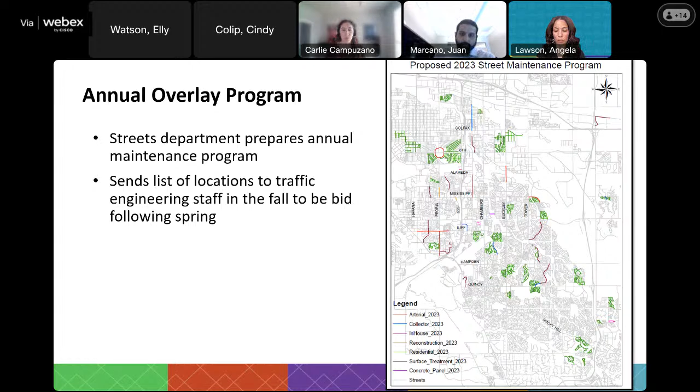They normally send the initial list to us, to my group in traffic engineering, around every fall. And then we go through this list really closely to determine which projects we want to include that will be then bid out in the following spring. So from about fall to spring is when we're looking at what we want to do as far as making changes to striping.

Next, I want to touch on why it's beneficial to restripe with an overlay or with the other pavement maintenance types of projects as well. So these pavement maintenance projects really just give us a clean slate of roadway to work with. If we're looking at making big changes, it's a lot easier to make them when there's no markings on the pavement, rather than trying to make changes to a road that's already striped.

Sometimes we do make some changes to roadways that already have striping on them, but in those cases, what we have to do is conduct some removals of striping. Removals can be pretty tough. They either have to be ground off, which is really time intensive and is not great for the pavement, or there are other ways they can be removed, but they end up not being always fully removed, which is another issue. So it's really the best time to make striping changes is when there's either a brand new roadway or when these pavement maintenance activities take place. We really try to capitalize on that to get some of our planned improvements in with that project.

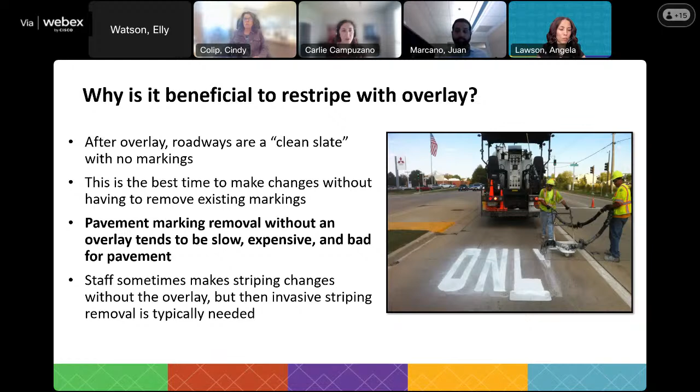So I wanted to take you through the process of how we review roadways for striping changes. When we get that initial list from streets, a lot of times they'll already have it uploaded into GIS. So we, being the traffic engineering group and my team, as well as our transportation planning group, have different meetings where we look at each and every roadway planned for pavement maintenance.

We look to see which roadways already have striping. For roadways that already have striping, are any of them already planned for bike lanes as part of our bicycle master plan? If not, we still look to see whether bike lanes would make sense in that location, or if there are other striping improvements needed that might not be bike lanes - like auxiliary lane changes or intersection striping changes. We look at all that and develop a list.

Once we have our list of projects, we also take them forward to a bi-monthly group we have internally at the city with a lot of different city departments, so we get others to weigh in as well, such as PROS and some other folks on those meetings. We try to get more input on which roadways should be included.

From there, we also sometimes need to collect data. If we're looking at reducing a lane or changing auxiliary lanes, then sometimes there's a data collection piece of this as well. After all of that process, we look at how we can implement these projects.

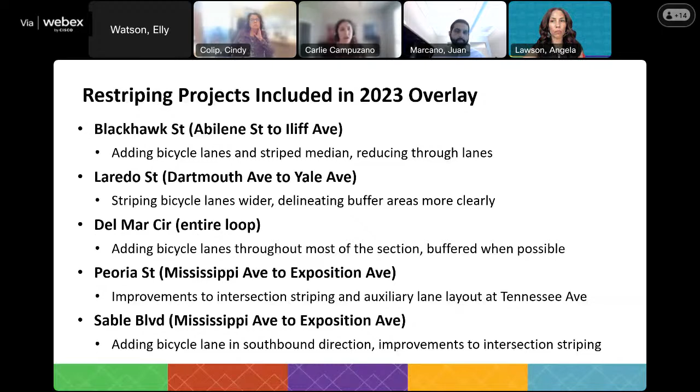So just wanted to give a couple examples of what these look like. This is Blackhawk Street, just a snip of a little part of it from our plans. The top part is our design plan that we created, and the bottom part is just an existing aerial. You can see it had 2 through lanes in each direction and a center 2-way left turn lane, and we converted that to a buffered bike lane with the striping redesign. The top graphic shows our plan for that.

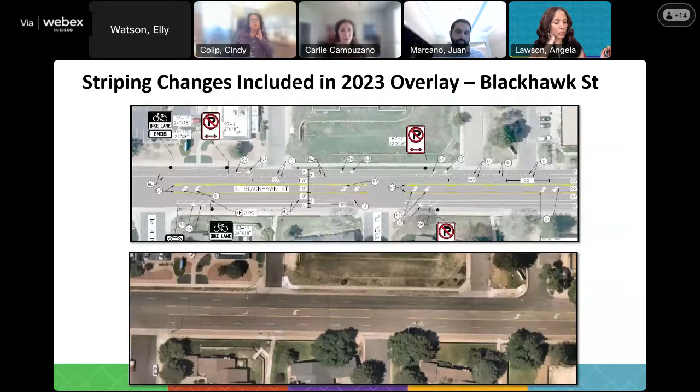This next graphic shows our proposed plan at Del Mar Circle. There's another one where there's a lot of pavement width out there. It didn't necessarily have too much striping, but did have some. So that's an area where we added bike lanes throughout most of Del Mar Circle and added some buffers as well, and had to tie into the signalized intersections, which can be a little tough since sometimes we have to adjust signs and signal heads and things like that.

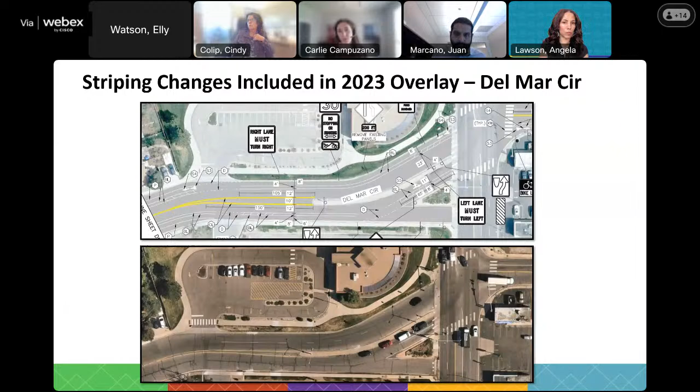So that is an overview of our plans for this year with the overlay program. But I also wanted to quickly touch on bike lane projects in general that we sometimes do without the overlay program. What the pavement maintenance program really gives us is a clean slate. So a roadway that already was striped is one that we really want to look at updating before it just gets restriped as it was before. But we have some roadways in the city that are planned for bike lanes that don't have any striping on them at all.

This is a project that we completed a few years ago on 23rd Avenue in Northwest Aurora. There were bike lanes already planned in this stretch of roadway, and there was no striping on the pavement before, just a wide stretch of roadway. So we went in and added some striped bike lanes in 2019 or 2020. There's no benefit to adding this into an overlay program since there's no striping to begin with.

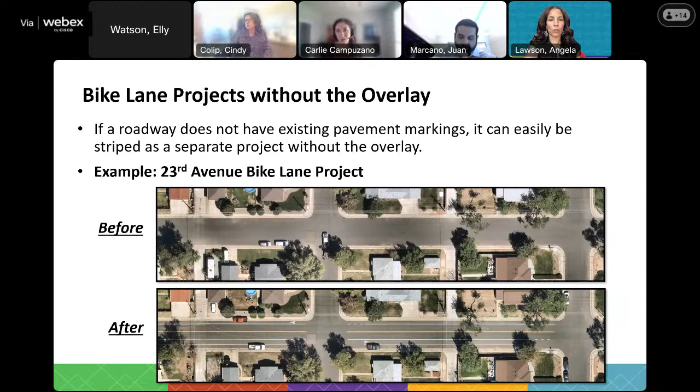So then just touching on some next steps. On a staff level, we're going to continue to review all of our pavement maintenance plans and see where we can recommend changes and design changes to the existing striping. Another exciting thing coming up is we are actually going to be updating the city's bicycle master plan as part of our upcoming multimodal transportation master plan. We had a kickoff for that study last week, which is pretty exciting. Our bicycle master plan will be updated using a lot of different resident feedback, and that should really help inform and prioritize future bike lane projects.

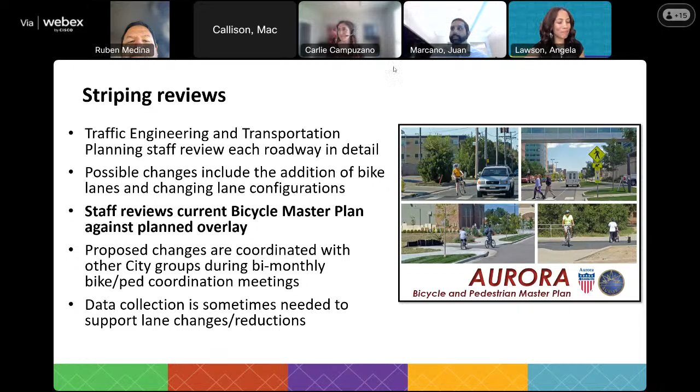Well, thank you so much for that presentation. That's all I have right now. I'm just very excited about the master plan and the bike master plan being reworked, so we're being incorporated into all that. So thank you.

So moving on to 4B, it's our snow and ice control plan for 2023 and 2024, and looks like we've got Lynn presenting on this one.

So, Lynn, you've got the floor. Good afternoon. Give me a second while I figure out the share. I always have a problem in WebEx. There we go. Can everybody see my screen?

Yes, ma'am. All right, great. Well, thank you, Chair Marcano and the rest of the committee for your time today. My name is Lynn Center. I'm the Deputy Director of Public Works in charge of operations, and part of what my job entails right now is snow removal, our favorite topic around here.

And what I'm here to do today is to go over our 2023-2024 snow and ice control plan. Our mission in ops is to provide the best possible level of service for the public within our budgetary constraints, as we all have.

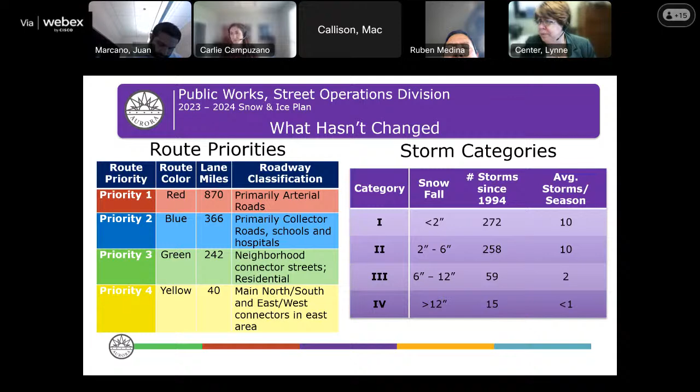This is an example of our snow map, showing arterials in red, collectors in blue, and residential streets in green. Our objective with the plan is to provide safe movement and passage for public service and emergency vehicles. We try to do as much as we can with the resources we have for the storm conditions we're getting, so we staff to cover reds and blues for both Category 1 and Category 2 snowstorms.

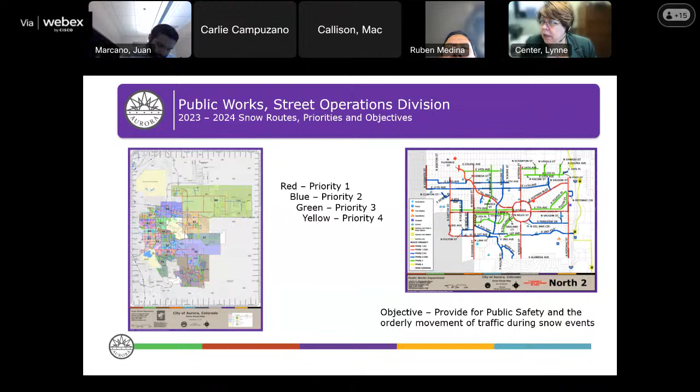Oh, sorry, my computer is running a little slow.

So changes to the maps for this year: we added almost 4 lane miles of priority 2, the collector routes, and almost 9 miles of priority 3, the residential collectors. I've shown here the route areas that are impacted, mostly in the northeast part of the city—think Aurora Highlands, Murphy Creek. As those areas develop, we expect to see more expansion of our snow routes in these areas.

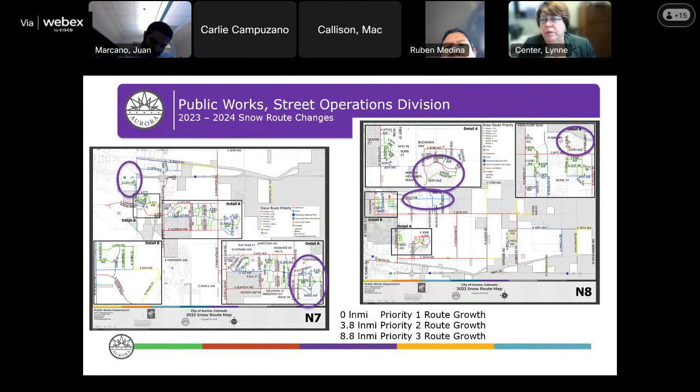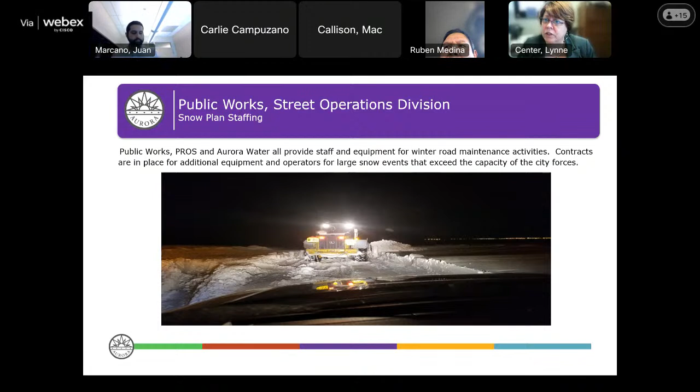To accomplish all this, we partner with Parks, Rec, and Open Space and Aurora Water. If we get to a point in a snowstorm, or a predicted snowstorm, where we feel it's going to exceed our resources, we have contracts in place where we can call up contractors to bring in snow removal equipment and operators to supplement our efforts. We haven't had to do that very often—those usually are Category 4 storms, typically over 12 inches, but it could be dependent on the snowstorm.

We put that down before the snow starts to fall. Where that helps us is when we come back through and plow, we can plow down to bare pavement instead of a sheet of ice. We don't plow down to bare pavement during a snowstorm. We leave about a half inch to three-quarters of an inch on the roadway, and that keeps the chemicals in place working for us instead of running down the gutter.

We have nearly 90 pieces of equipment through the 3 departments to deal with snow, ranging from our typical snow plow that you see on the left-hand side of this slide, up to our heavy-duty snow blowers and our heavy equipment and graders.

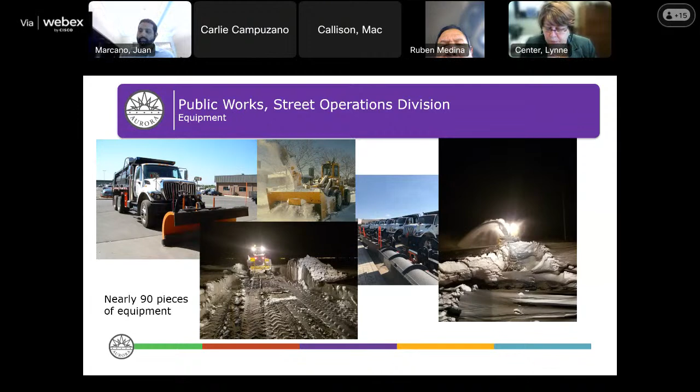Okay, summary of some of the changes. So we did add some blue and green routes. We didn't add any priority 1 routes. We added language to clarify our non-prioritized residential streets, because we've been getting a lot of questions about that. So we added some language about that.

We added a section that specifically addresses extreme conditions. And these aren't necessarily just weather conditions, it could be other resource conditions. So for example, if all of a sudden we lost half of our trucks, or we lost more than half of our personnel, that would be covered under the extreme conditions section as well.

Lastly, we added language, not very specific, but language that indicates the city has the ability to implement a program that would allow private entities to plow residential streets. That is to address the newly approved snow IGA, which allows special districts and HOAs to plow residential streets within their boundaries after they've executed an IGA with the city to do that.

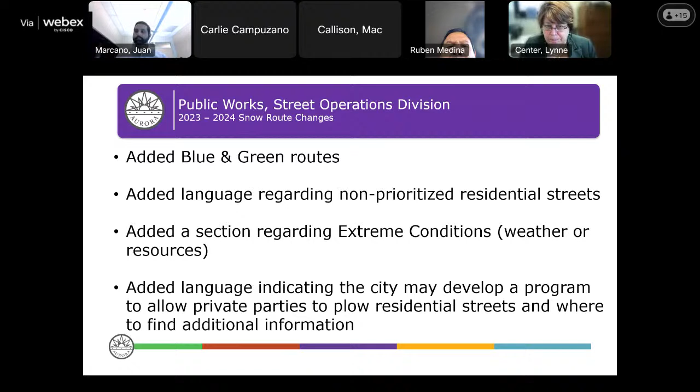In summary, we have 870 lane miles of red, 366 of blue, 242 of green, and 40 of yellow, for just under 1,520 lane miles, which is still a 2-lane blacktop that's 759 miles long. That gets us to about Columbia, Missouri. I think probably next year we're going to have to change the picture, because I think we'll be past Columbia at that point. Oh my God.

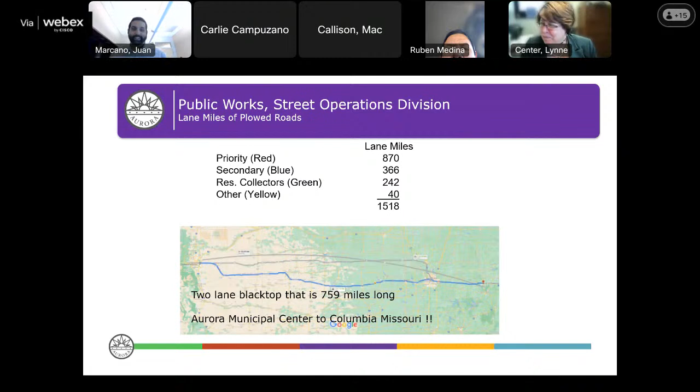Also included in our snow and ice plan are some staffing guidelines. Again, no 2 snowstorms are alike. So where we might really need to staff, say, 90 per shift, that doesn't always have to apply to a Category 3. If we have really extreme weather conditions, high winds, extreme cold, we may need to go to 90 per shift in a Category 2 snowstorm. So this is a guideline, and it's our starting point for when we're doing our planning.

Oh, and I have to put in a plug. APWA granted our snow and ice control plan a model practice designation for our last reaccreditation. So we're going through that again in 2024, and fingers crossed we'll get it again. Great.

Some challenges we're facing are staffing, just like we had last year. We are still down almost 40%, which is 28 positions in our operator and driver positions. Aurora Water is still showing a 20% vacancy, and PROS is still in that 15 to 20% vacancy range.

So we're going to employ the same strategies that we did last year to help overcome and address some of these staffing shortages. One is to try to increase our seasonal workers, and we were actually able last year to add 2 seasonal workers for streets. These were employees who left streets, they retired, but they still like to do snow, so they come back and they do snow for us. They'll be back again this winter as well.

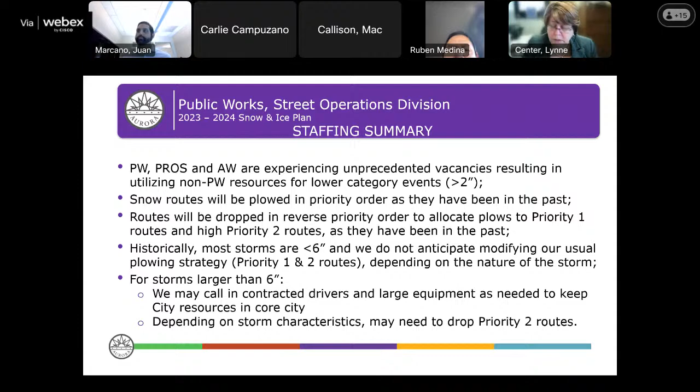Historically, most of our storms are less than 6 inches, and we don't foresee any problem maintaining red and blue routes for storms less than 6 inches. Larger than 6 inches, we may call on contracted drivers and may need to drop those priority 2 routes. It just all depends on the characteristics of the snowstorm.

Okay, so moving on to how do we plan for a snowstorm. We use all of these tools, some free like our local media, and some that we pay for. We take into account all of this information because predicting weather, particularly in Colorado, is a bit of a roll of the dice. The more opinions you have, the more you can kind of circle in on what might really be happening.

So we start our planning 5 days in advance and really get it nailed down 12 hours before snow is predicted to start. I'd just say our local news and everything is great, but take their weather predictions with a grain of salt.

As we're doing our planning, we put out notices about what our plan is and what we're seeing in the forecast to everyone. So please look at those, and if you have any questions or concerns, feel free to call.

So this winter, everybody wants to know, what's this winter going to be like? I did actually consult the woolly caterpillars this year, and they were indecisive. Several resources showed some parts of the country very different than other parts.

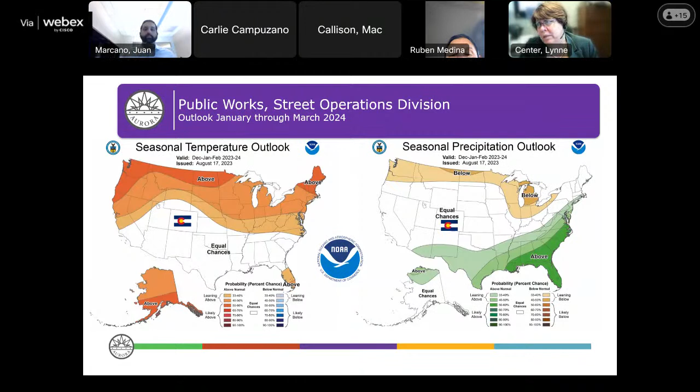And then from December through February, we're looking at about average temperatures, which will probably be a little bit colder than we've seen in the past. And again, the same amount of snowfall, so our averages. So we're looking for a lot of snow in February and March, which is where we usually see most of our snowfall.

That is the end of my presentation. I'd be glad to answer any questions you might have.

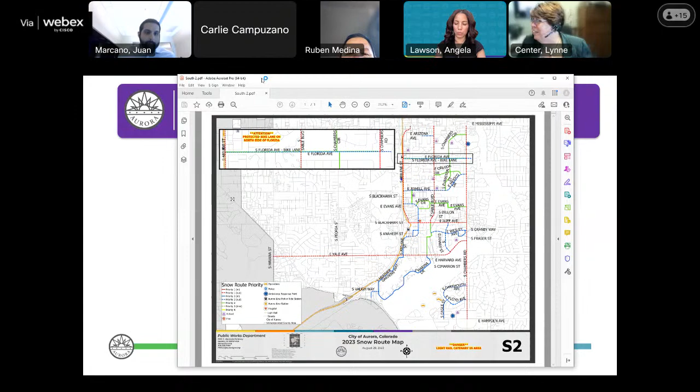I'm trying to pull up the map. Sorry, bear with me for just a second. One of the things we do is take a look at the routes every year. Excuse me, it's coming up where I don't want it to be. So maybe this is good, I'll just share. Okay, so you were discussing Cimarron. Is Cimarron right there? Yep, right there. Okay, yeah, so I get a lot of complaints about it being green and not blue. Yeah, because I'm not sure—I think that's something we need to check, and I'll make a note.

Okay, great. I think I brought this up last year, and that's the response that I got as well. So I'm going to keep pestering y'all. It could be—sometimes we have an issue with parking on the sides of the street. So I'm not sure. I am not sure, and I'm not sure why. I'll have to dig into our conversation, our notes and stuff to find out why it's still green. And I don't remember why. I have an answer for you on another street, but that one I don't know for sure.

Okay, cool. Well, I guess when y'all find that out, would it be possible to just email the committee with a quick update? Yes. All right, thank you so much. Yeah, to Iliff, blue.

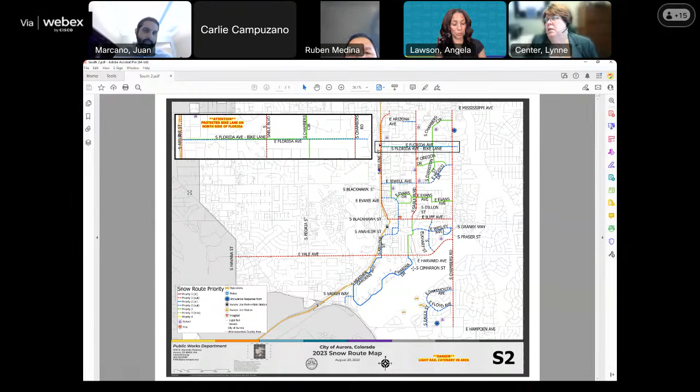Second question I have for you is regarding vacancies that you shared with us. 40% is really high. So what are the current strategies to retain those positions aside from filling them? Because contractors are going to be more expensive than just hiring internal FTEs. I guess what success have you had, and what's the reason folks are leaving?

We've had this vacancy rate for a couple of years now. Our operator pool within the city is very experienced, meaning they've been with the city for a long time. Probably about half of what we're seeing are people that are retiring. We also have people who are chasing the dollar, and I will say we've had some of those people come back too. So a lot of it is that — it could be the pay rate, but it could just be people retiring.

As far as what we're doing, we're trying to advertise everywhere we possibly can. I think Cindy was mentioning the other day that there are some job fair type opportunities coming up that Public Works will be in. And then I believe we were looking at a LinkedIn campaign that would get some of our positions out there, which might generate some more interest.

Yeah, and I can add to that. We're working with HR to do a marketing campaign on LinkedIn for our vacancies, and we do have career fairs that we're attending scheduled for next week. We're looking for future opportunities for that as well. And I think with the compensation study that HR completed and has been implementing in some of our career progression, that is providing a little bit better applicant pool.

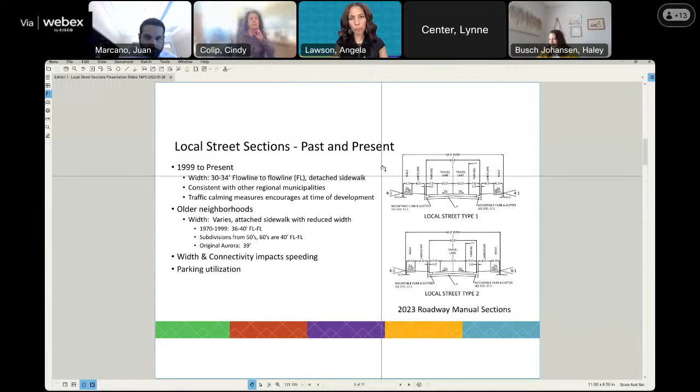Sorry, I'm just going to interrupt you for a second because your presentation, while full screen, still has a border, so it's not as large as it could be. Okay, I could try and switch. Bear with me for just a second. Is that just a me problem, or is everyone else seeing it a little small? I doubt it's a you problem. Yeah, but thank you for saying something. Let's see if I can get this to work. Can you see? There we go. All right, okay. One more moment while I try and figure out my end. Okay, here we go.

For the local street sections, these are defined in the city's roadway design and construction specifications. Since 1999, and as well as currently, it's a 34-foot wide section, flow line to flow line - basically curb to curb. That section includes two 10-foot travel ways and two side parallel parking areas that are 7 feet each on both sides. It also includes a curbside landscaping area and a 5.5-foot detached sidewalk. That's shown in the upper right here as local type 1, the primary local street section used for residential applications.

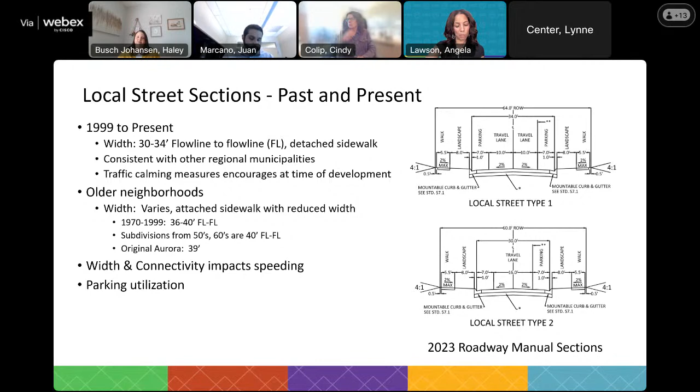So the street sections and the width are developed considering a number of different things. We're looking at the physical characteristics of vehicles and movements, talking more about the flow line to flow line right now. But the physical characteristics of the vehicles, the movements of those vehicles, and the parking.

The other considerations that we take into account are fire trucks, buses for schools, and larger trucks as well. But generally the design is based around the fire trucks and kind of those delivery vehicles.

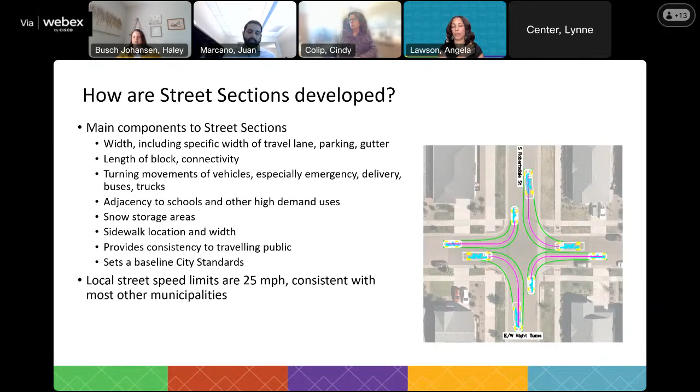The other item I'll just note is that our local speed limits are 25 miles per hour on locals, and that's, unless Carlie wants to correct me, I think that's defined in city code.

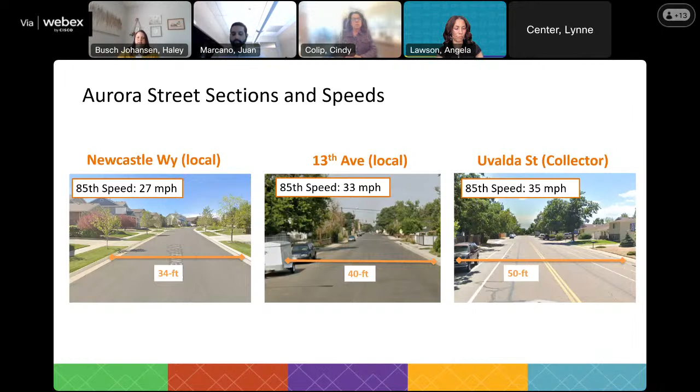So I'm going to speak a bit about the future developments. Right now we're talking about the width of the section. Our current local roadway width is being utilized in those future developments, and is narrower than the original and existing Aurora that's been developed from the 70s and 80s.

The other component that we have when we're reviewing developments coming in for design is encouraging the use of traffic calming. Carlie and her team have traffic reviewers that will look at the proposed developments coming through and recommend using traffic calming in the future developments, including those in the design so that they're within the development right at the outset of construction.

Some of those devices include the mini or compact roundabouts, striping the roadways so that there's narrower lane widths. We also can incorporate improved pedestrian crossings using flashing signs, or having curb extensions to reduce the amount of time a pedestrian would be in the travel way at those intersections and at mid-block.

So those are some of the things that we're using for future development.

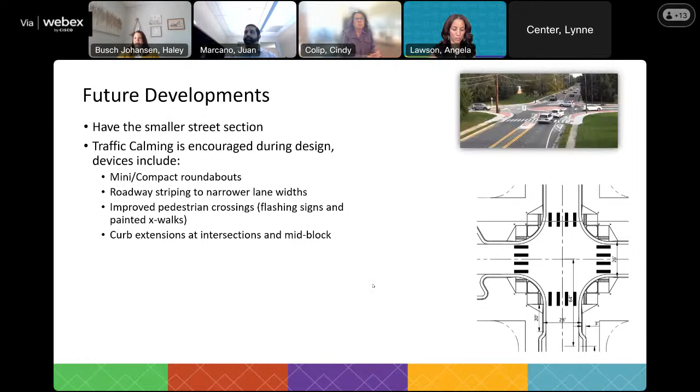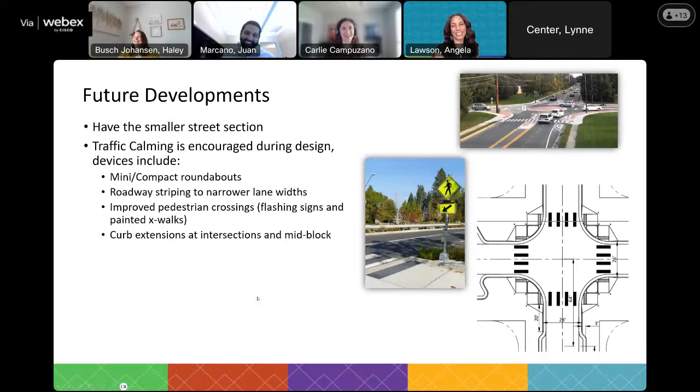Oh, that's fun. I didn't realize we had a graphic change here. This was my fault, I got fancy with a PowerPoint a while ago, and now when we copy it over everything flies all over the place. Sorry, I don't know what I was thinking. If you can probably click a couple times on this one. Yeah, okay, thanks for the heads up. I won't use any of those settings. Yeah, took me by surprise.

I'm gonna turn this one over to Carlie anyway now, so she can talk about the existing developments and what we do for those.

Thanks, Haley. So there's a few slides where we talk about how to retrofit and what we currently do with existing developments and areas that are already built out. Because as Haley mentioned, a lot of our newer standards do take into account some of our lessons learned and have new details, but a lot of what we receive complaints and concerns about from residents is in our existing areas and existing neighborhoods.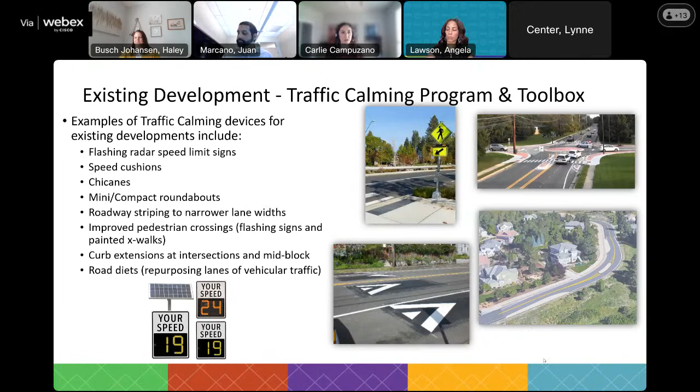And if you could go to the next slide, Haley. I don't think I made anything fly on this slide. We should be good now.

So other options and considerations we have for some of our existing neighborhoods are, first of all, there's different intersection treatments that we have. Haley showed a previous graphic of a bulb out or curb extension, which really focuses on narrowing the width, but only focused at intersections to reduce the travel width for pedestrians and make folks feel like the roadway is slower and slow them down a bit. And we do have a detail for that in our roadway manual.

So we have a couple funded projects already using grant funds in Northwest Aurora, where we tried to focus those projects around locations with a crash history. So we have those types of projects. It is possible to reduce the street width by moving the curb and gutter. Those types of projects where we're physically changing the roadway have a lot of different considerations that we need to take into account with those types of designs.

So first, just because of a lot of different constraints in these existing neighborhoods, one of the big considerations is cost. Just for example, if we were to go widen a sidewalk on both sides of a street on a local neighborhood for 1 mile, the cost would probably be about $4 to $5 million. So that's a pretty significant cost for not that long of a stretch. And that's kind of what we've learned with a few of our recently completed sidewalk projects. Just the bids we're getting on all construction projects lately have escalated a lot in the last few years, and even just a simple sidewalk widening project has become really expensive.

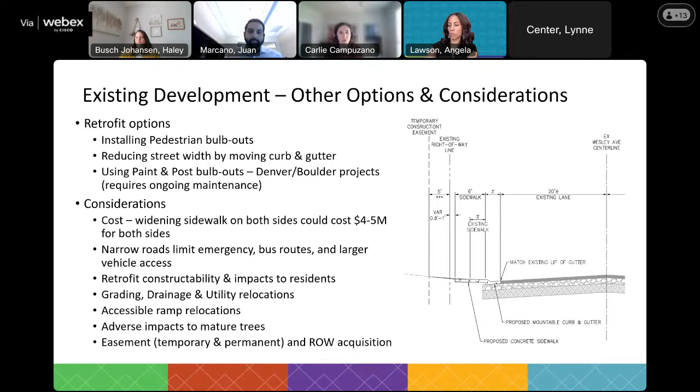Another thing to keep in mind is just when we're widening sidewalks or modifying a lane section, it's difficult sometimes to tie into the existing slopes. So whether that be the crown of the road having impacts to how we can design it, or if we're widening the sidewalk in one of our existing neighborhoods and we need to bring the sidewalk back at a relatively flat grade at 2%, a lot of times that means we're going to need to tie into other things on private property. We might need easements, and it's just a very long and expensive process that impacts our residents. So those are some considerations to change roadway sections for our existing areas. And if you could go to the next slide, please.

So here are a few examples of projects that we already have and have either constructed very recently or that we have in design. First, we recently completed a project where we widened a sidewalk on 25th Avenue in Northwest Aurora to create a pedestrian boulevard.

This project was a recommendation in a previous planning study, the Northwest Aurora mobility study. So we didn't just widen it to our standard width, we went further and made it a pedestrian boulevard on the north side. We also reduced the overall roadway width, so we did widen into the road in this case. The project was about $1.4 million and was only about 1/3 of a mile.

Part of that extra cost, though, was because of the grant funding and clearances and extra approvals needed as far as that process.

Another project we finished, or we're still finishing, but it's almost completed recently - which Chair Marcano, I know you're really familiar with this one - the Lima Street project, where we widened a sidewalk on one side of the road for half a mile. That project was over $1 million for construction.

On that project, we just removed the curb and gutter, replaced it where it was, and widened back. Our cost estimates for widening into the road on that one would have actually just about doubled the project cost. There were all sorts of different constraints to work around, with trees, utilities, street lights, all sorts of different things. But that's one example of a recent retrofit project.

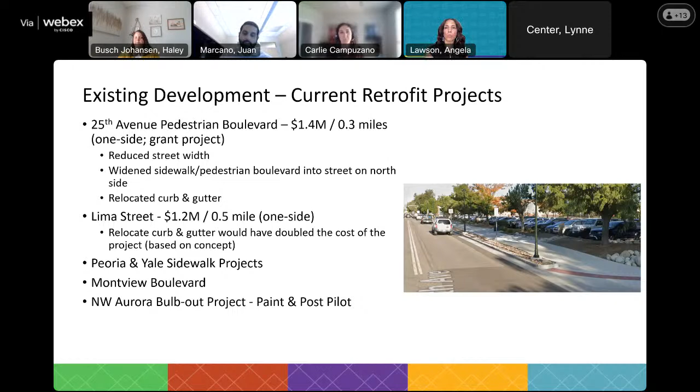The Montview project does include roadway widening as well, I'll add - so it's not just sidewalk, there's a lot of different improvements in that project. It's a very multimodal project along Montview. Awesome, thank you, Haley.

Is this the next slide? Okay, so I just wanted to go over a recap and then some of our next steps as well.

Circling back, our local street sections that are being installed in the newer areas of the city are a lot different than what is installed in the core area of the city, in the pre-2000s developments. Our roadway widths now are a lot narrower in general, and I think that does help fundamentally with some of the speed concern issues we've had. Another thing is that our sidewalks now are primarily detached, which I think helps a lot for people feeling like they're further away from the road, and for pedestrian safety as well.

We are also moving forward with our traffic calming program to address some of the existing areas in the city, so that's an ongoing program. Council has been great at providing annual funding for that program. We're still accepting applications, so definitely direct residents over there.

And I feel like we mention this in every presentation, so it's my time to mention the multimodal transportation master plan project, which is a big planning level project we're, again, very excited about. The scope of this project actually includes reviewing our existing city standards and making recommendations for adjustments to existing standards.

So we'll definitely be getting some extensive public feedback, which will inform some future updates to our city standards. And Haley is proceeding annually with updating our roadway design and construction manual with various changes and lessons learned. We're going through that process right now, and we'll probably have a new roadway manual updated early next year.

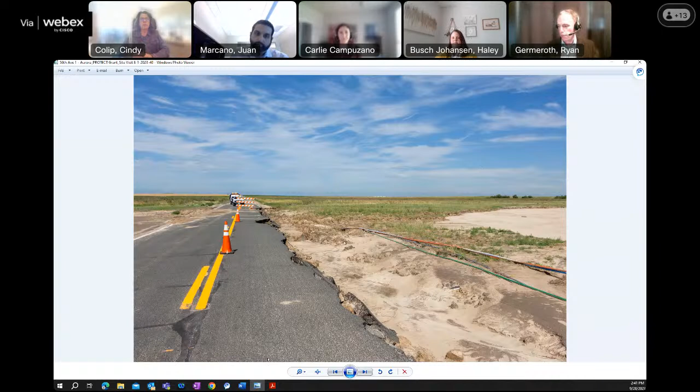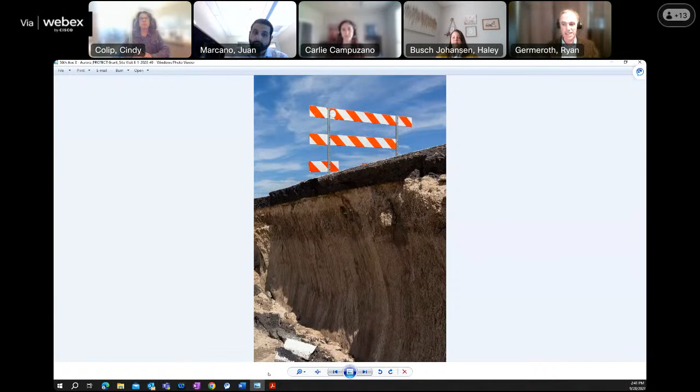So real quick, I'm going to run through a couple pictures here for Hudson and for 56th. Hopefully you can see the photos I have up on the screen. Just to recap, I wanted to show the condition out there so you're all aware. I think you've seen some of these pictures before, but I'll go through them real quick. This is 56th. The washout that occurred back in June really wore away the edge of the road along 56. So we have a condition where the road, you can still drive down the center of it, but the drop off on the edge is pretty substantial, and it's not safe for the public to be traveling down it in case they were to run off the road.

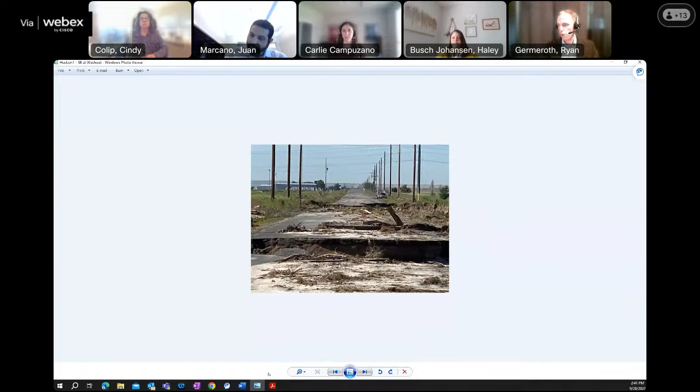Hudson, by comparison, is impassable pretty much. You've all seen this picture before where the road has heaved in several locations, and very similar to 56, it has a washout along the edge, but it's more substantial. We even have about a 50 to 100 foot section that's completely gone. And that's why immediate repair was not one of the options we pursued, because the cost to do an immediate repair to get the roads back open sooner would have resulted in a decent amount of throwaway for the grant funded project we put in an application for, the Protect grant.

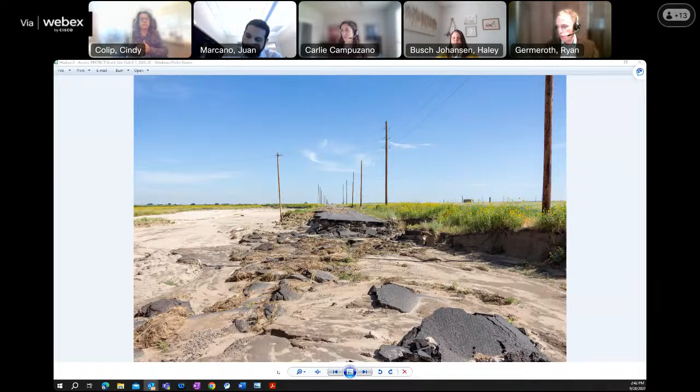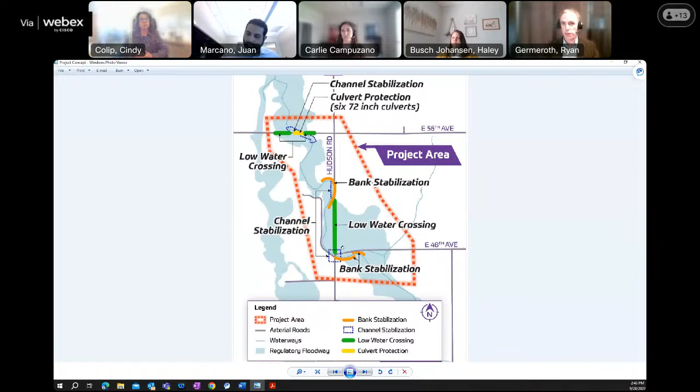And then we're going to be implementing what we call low water crossings. The side of the road is going to be armored with concrete so that the water can actually flow across the road, similar to what it did back in June, but it won't wash out Hudson or 56 in the future. The cost for that project is about 18 million, which is the total project cost in the grant application we put in. The city's putting 3.5 million in for a match, and then we also have another 3.6 million we have to put into the project to rebuild what was existing essentially, and then we'll enhance it from there with the Protect grant money.

Now, if we don't get the grant, there's the possibility of that happening, of course. We would proceed forward, probably not doing the full project that I showed with the armoring and even some of that stream stabilization, but we would rebuild the road as best we could for a lower dollar amount to be able to get the roads back open.

So that's a real quick overview of the project. We are going to start putting the RFP together for the design here in the 4th quarter of this year, to be able to hit the ground running if we do get that grant award come November, so that we're able to streamline the schedule as much as possible. So that's a quick overview of that project. I don't know if there's any other questions on that.

I appreciate that update, because we had a resident come out and talk about the closure at our last council meeting, so I just wanted to see where we were at on that. I appreciate that. And you said this is already publicly posted, and has she been notified?